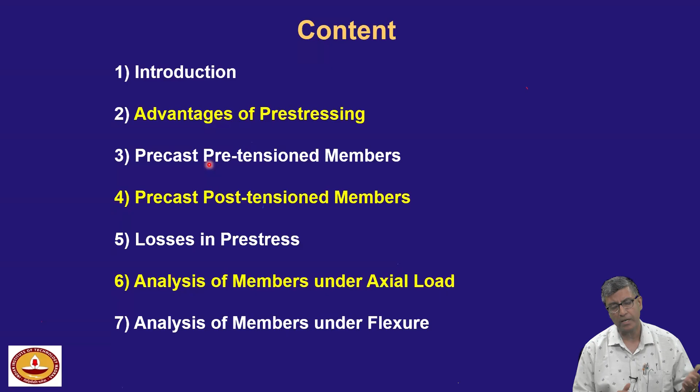Myself and my senior colleague, Professor Devdas Menon, developed a web-based course on prestressed concrete structures under the National Program on Technology Enhanced Learning. If you are interested, you can go there and learn more about prestressed concrete. I picked up the slides from there, but summarized into a packaged form for one hour.

The relevant code for prestressed concrete in buildings is 1343. However, if you're working with bridges, you have to follow IRC 112. If you're working with railways, you have to follow the IRS code. That means you have to have this flexibility whenever you go into the industry.

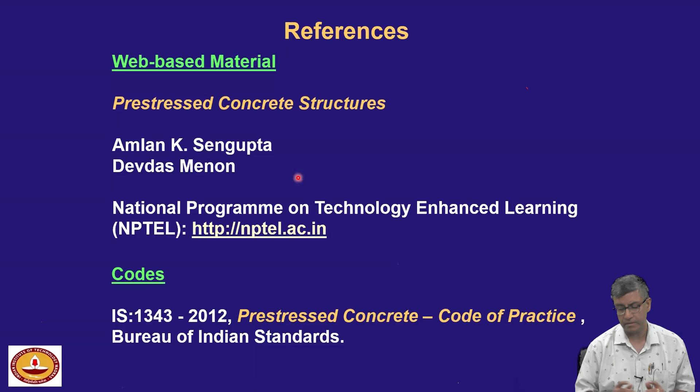Now, what is prestressing? It is the application of an initial load on a structure to enable it to counteract the stresses arising from subsequent loads during its service period. Once you put an initial load, the member is always under load. Conventional members are under self weight and superimposed dead load, but a prestressed member is also subjected to compression. Hence, creep is much more important in prestressed concrete compared to conventional reinforced concrete.

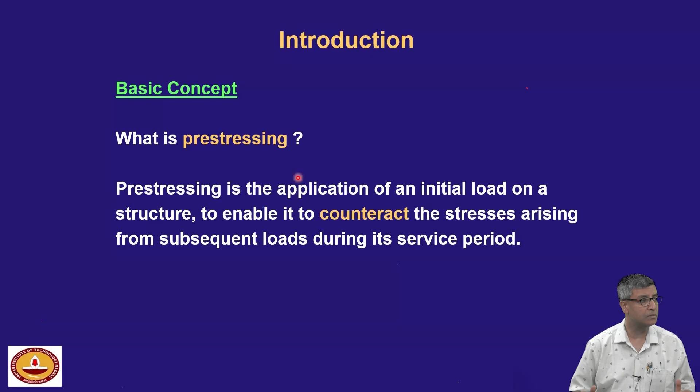Now, if I look into India, prestressing was done during British time, in Meerut and Karachi, where airport hangars were prestressed. After independence, the northeastern part of our country got disconnected completely because the railway lines ran through present-day Bangladesh. The Assam Rail Link project was taken up on a war footing to get the northeast connected. The whole country was in turmoil at that time. There was a refugee influx and a lot of problems. This was a mega project taken up by the Indian Railways.

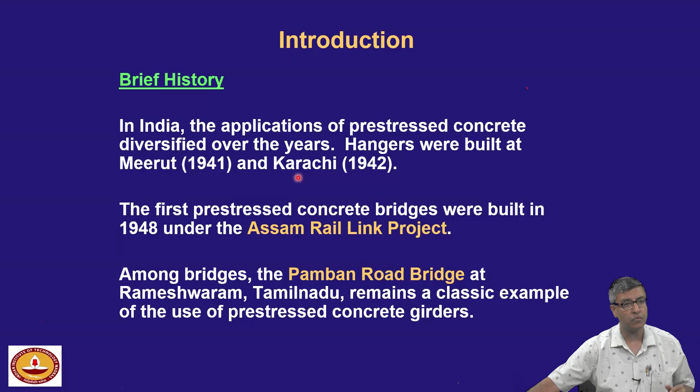Among the bridges, the Pamban Road Bridge is a classic example, and I will show you photographs today, which connects Rameswaram Island with mainland India. The person behind the Assam Rail Link project was Karnail Singh. There is a classic report by him, a complete story of the Assam Rail Link project, which you can download from the internet, and you'll appreciate that even 75 years back, it was absolutely brilliantly written, not just theory but how it was implemented. He was also supported by John Gammon, who had come to India to bring in the technology.

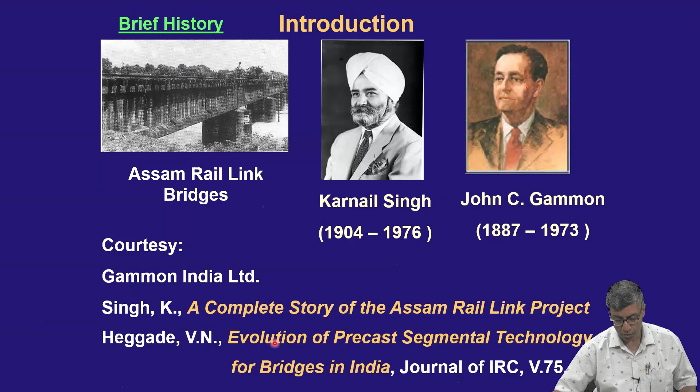Mr. V.N. Heggade, who was with Gammon India Limited, his journal Evolution of Precast Segmental Technology is also worth reading. Sitaram Joshi was actually a Gandhian in principle and dress. He wanted to bring this precast technology. Please note, Atmanirbharata or being self-reliant is not a present-day buzzword.

No, it was right after 1947. If you look into this advertisement, his company is designing this Kosi bridge in UP. Please note, the bridges in UP and Bihar are in extremely challenging conditions because of these rivers which flow heavily during the rains.

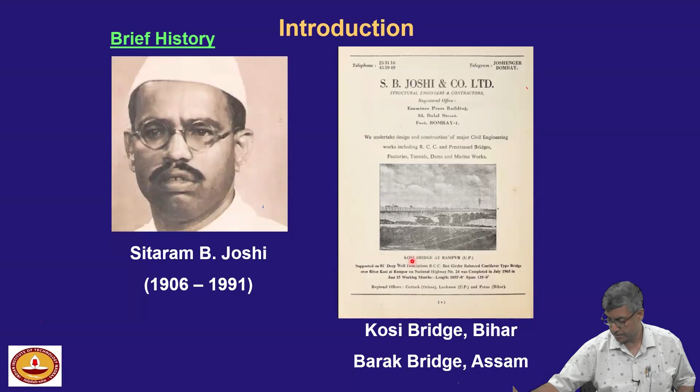T.N. Subba Rao, who was the lead of Gammon India Limited, was a pioneer of what Gammon is today. Please note, these companies have an illustrious history.

Our present generation doesn't know. Now, ignorance is not a solution. That's why we have to stay aware of what civil engineering has done to our country. We cannot blame our ignorance and say there's nothing in civil engineering. Okay, you have role models. Better let's live up to the expectation of what our forefathers had left to us.

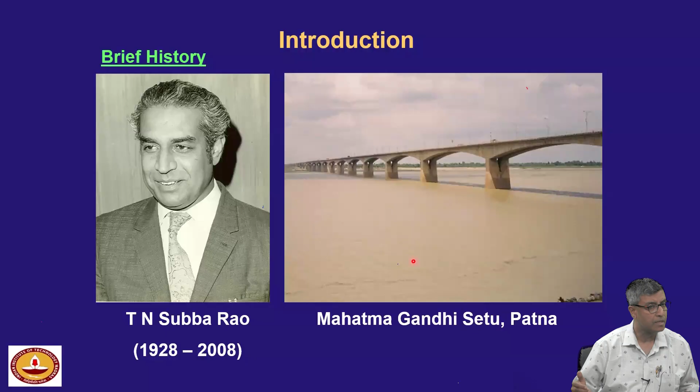This particular bridge, the Mahatma Gandhi Setu in Patna, is a classic example of the prestressed technology. In present day, of course, it has been subjected to corrosion. Now the superstructure had to be replaced, but that's a different issue.

Coming to the Pamban Bridge, this was done by Gammon. And here, if you look, these navigational spans, which have to have a minimum clearance from the high tide level, were done using prestressed box sections. The approaches were, of course, of a different type. Apart from the steel bridge in Pamban, this bridge also is a classic example of technology, and this remained the only marine bridge till the Bandra-Worli Sea Link came up.

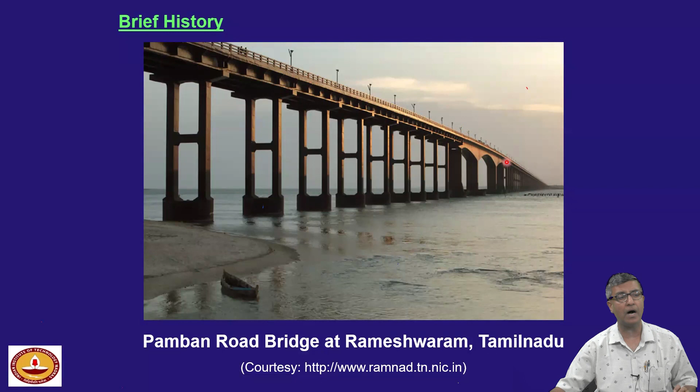And now we also have the Atal Setu, which is an absolutely brilliant technological marvel. Mr. Raghavan had mentioned about Chander Alimchandani. I did not mention him on the first day because his work was primarily with bridges. Today I'm mentioning him. He was the lead of STUP.

He worked with pioneers in France and brought that technology to our country. This project was mentioned by Mr. Raghavan, the aqueduct in a very dry area of Maharashtra, where this pre-stressing was done. The whole section was optimized based on the hydraulic pressure. And what a wonderful aesthetic design just for an aqueduct.

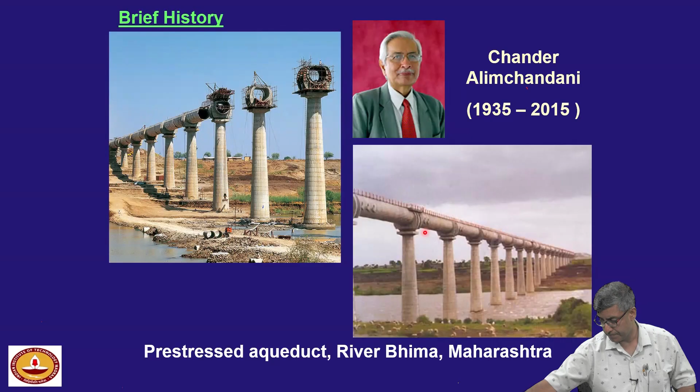He has been honored by FIP. Even Mr. Subbarao had also been honored.

Mr. Mahesh Tandon was trained in the US and has the Tandon consultancy, and they have done wonderful work throughout Delhi and other parts of the country. They have worked on the metro viaducts, and pre-stressing has been extensively used in this type of design.

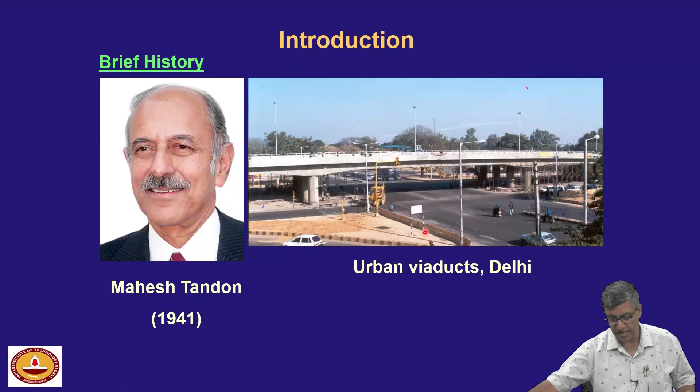Now coming to the advantages. First and foremost, under service conditions, pre-stressed concrete sections stay uncracked. Typically, even if we design for a cracked section under characteristic load, since the characteristic load doesn't occur most of the time, the section stays uncracked. And that leads to all the corollary benefits.

Increased durability, increased strength in terms of shear, and it also provides higher moment of inertia. While doing deflection calculations yesterday, I had written in brackets, consider the section to be uncracked. That means if it cracks, deflection will be more. So if you can keep the section uncracked, your deflection will be reduced.

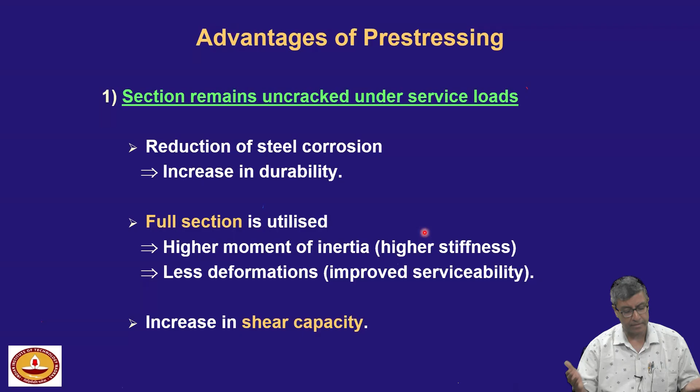On the contrary, you can have higher spans, and that's what the next slide shows.

Another important point because of uncracked sections, which is not very relevant to this present course, but for those from water and effluent treatment, it is very relevant: for any liquid storage tank, especially circular tanks, you can incorporate pre-stressing. That means you can even think of this option, go for a circular section, go for pre-stressing. There are different ways of doing it. Filament winding technique is there, and you can get that technology from abroad.

Now in terms of performance under dynamic load, I have written a buzzword called resilience. These days we are moving towards resilient design. Resilient means reduced damage so that functionality can be resumed as fast as possible. That is possible because the sections stay uncracked. So even under dynamic load we get some benefit, and also under fatigue load.

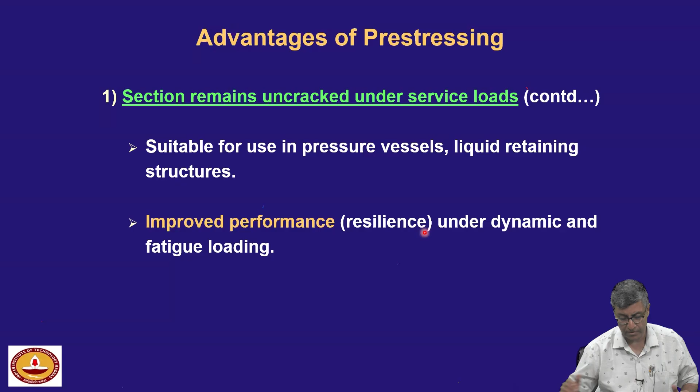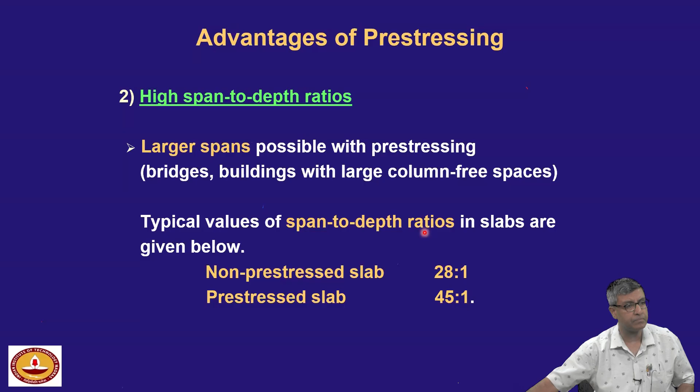The second advantage is high span to depth ratios, which Mr. Raghavan had already mentioned, beneficial for long spans, whether in buildings or bridges. Some typical numbers: for span to depth ratio, non-pre-stressed is about 28:1, while for pre-stressed we can go to 45:1. These numbers I picked up from a book by Professor Collins and Mitchell. For the same span, the depth can be reduced, which leads to reduction in self-weight.

But please note, whenever the depth gets reduced, you may have trouble with deflection. That's why pre-stressing reduces deflection, but if you're also reducing the cross section, that will increase the deflection again. That means finally a deflection check has to be done. It can give aesthetic sections, and they can be economical in terms of at least material consumption.

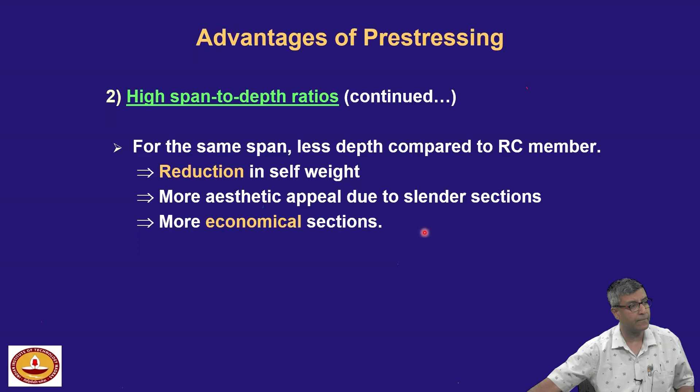But what are the challenges? These challenges I'm saying with respect to the Indian context, that we need skilled technology. It is not just like reinforced concrete, mix something and that's it, put some water and that's it. No. Today, when Professor Liberato was saying that the initial stretching is very important, it has to be done by certified foremen, period. Because these are high hazard, and we are talking of very large members, not a laboratory type of test.

Use of high strength materials is costly. We are going for fiber reinforced concrete. There's a proprietary material called Ductal. These are costly materials which are used in pre-stressed construction. Additional costs for the auxiliary equipment - what are the equipments? We'll be talking about it. And of course, we need quality control and inspection.

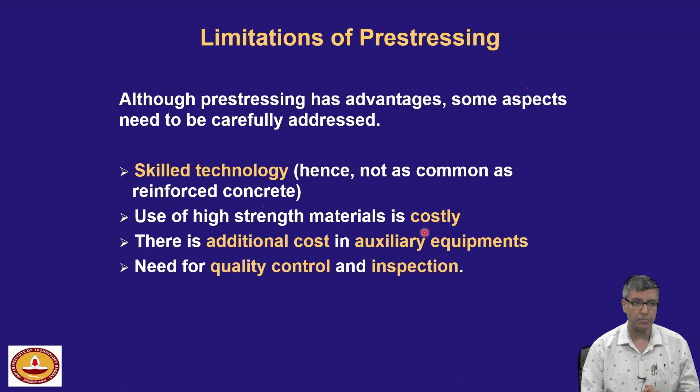Concrete cannot have bug holes, because whenever you are trying to stretch against the concrete, if it is having honeycomb, then there is trouble. Now, the pre-stressing can be classified in different ways based on how you are trying to apply the pre-stressing. Earlier days, they used some screw jacks. These days, we always use hydraulic jacks.

External or internal pre-stressing. External means, which is relatively rare, that the strands are outside the section. It can happen in a box girder, but concealed within the box. Or it can be even outside, which you can see typically for strengthening purposes. The classification which today I will be showing is pre-tensioning versus post-tensioning, because there are subtle differences in terms of the losses.

Linear or circular. Linear means the members are like an axial member, whereas circular means it's for domes, cylinders, pipes, water tanks. These are circular.

Full, limited, or partial prestressing. That means if you are designing a section to not have tensile stress under the service loads, that is called full prestressing. Initial attempts were like that - no tensile stress, then concrete is safe. But then it was found that if I'm designing for no tensile stress for the characteristic load, it is becoming uneconomical, and hence people relaxed that condition.

They said that we will not have cracks - there can be some tensile stress, but no cracking. That is called limited prestressing. In the 1343 terminology, these are type 1, type 2, and type 3. In the other international codes, some different terminology is there.

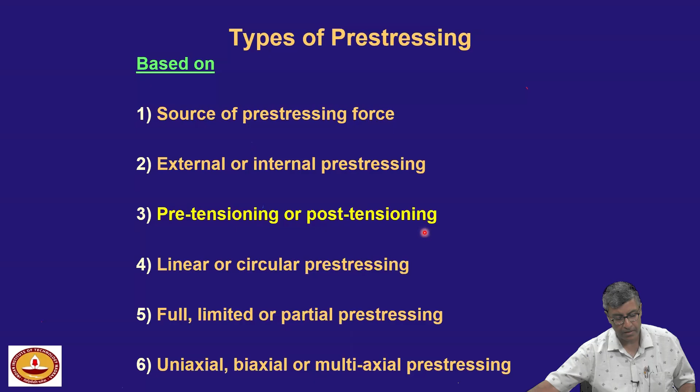Now, in this presentation, I'm just focusing on this pre-tension versus post-tension, and only with reference to precast members.

Now, these photographs I had taken when I went to visit a railway sleeper factory. Let's try to understand the procedure, because what is the purpose of a factory visit? A factory visit will not talk about equations, but it will give you an insight into how theory is being implemented. And let me tell you, unless you can implement the technology, there's no point of just talking in a class. Each of them are entrepreneurs - we typically don't realize who are the entrepreneurs in civil engineering, but they are the entrepreneurs. One Mr. George had established this factory.

This is called a traveling stress bench, where inside we have the mold where the strands are anchored, and this mold is placed within a self-equilibrating reaction frame. This whole thing can move on rails, for different operations at different locations of the factory.

This is the operation at the traveling stress bench, where the strands have been anchored. This is the dead end, and on the other side is the live end. This is the picture of the live end, where the double-acting jacks are stretching out this thick plate against which the strands are anchored.

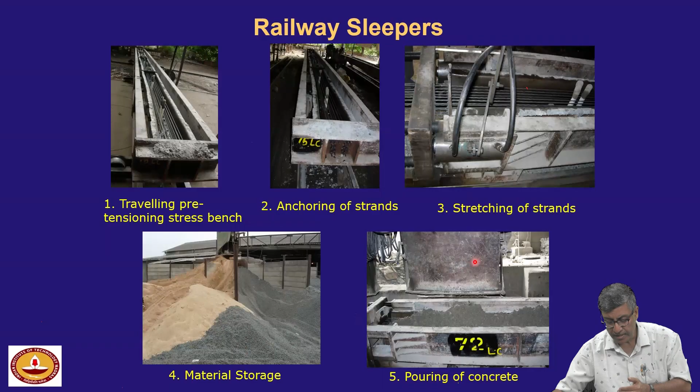From the hopper, there is a mixer up there where we went, but I could not take a photograph because it's very dusty. The concrete comes down through the hopper, and once it is poured, this whole stress bench is vibrated using motors attached to it, which shake it. People will also use needle vibrators, but these external vibrators give a better finish.

Then through the rails it is sent to the curing chamber, where there is a protocol for curing. Once cured, they are brought out and cut, and the individual sleepers are separated. This is the way they are demolded, and then stacked for further moist curing.

From here, the Indian Railways will take this up. In fact, the next photograph I will show is from Patil Infrastructure. Let me show that photograph, which I had shown earlier also.

This is the flow chart for the production of these railway sleepers. I'm just quickly going through them today: mold preparation, fixing of the insert, placing wires in position, stressing, batching after moisture analysis, pouring of concrete and compacting, removing the insert pin. These insert pins are specific for the sleepers.

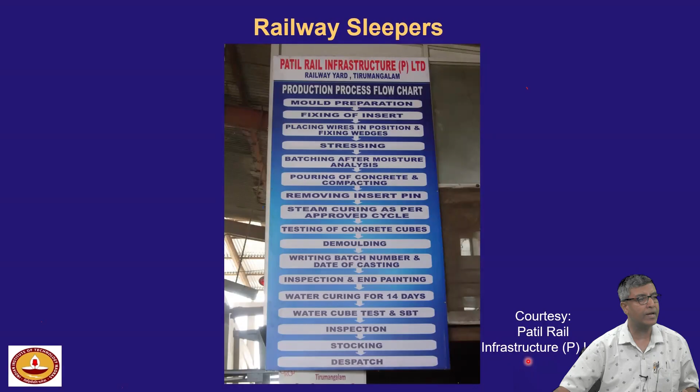This was taken by Patil Rail Infrastructure. They supplied these sleepers to Sri Lanka after it was devastated by the tsunami. The whole Ilam area needed the railway lines placed again, and we in fact went there to see this particular project.

That depends, I cannot give a single number. I felt 16 hours was a bit fast. When I went to this project, they were doing 24 hours. That means it can vary from place to place, depending on what you are producing. Steam curing, typically the way they do a cycle, is equivalent to 7 days.

That means before you're cutting, you're trying to achieve the 7-day compressive strength. Now, if you are able to do it in 16 hours, perhaps that's what they are doing. Even I was surprised that they're cutting it in 16 hours. 16 hours means it's like 2 shifts, whereas 24 hours means 3 shifts, because these plants typically run 24 hours.

I'm not the right person to say which will be applicable where - this is industry information, and it's a very good question to ask the precast people. Their production rate will not be as demanding as railway sleepers, and production rates also fluctuate depending upon demand. Like when we visited Patil Railway, they had to dispatch immediately a huge lot of sleepers to Sri Lanka. Indian Railways had requested us, IRCON, the construction wing of Indian Railways, to check whether what Patil Railway is doing is as per specifications or not.

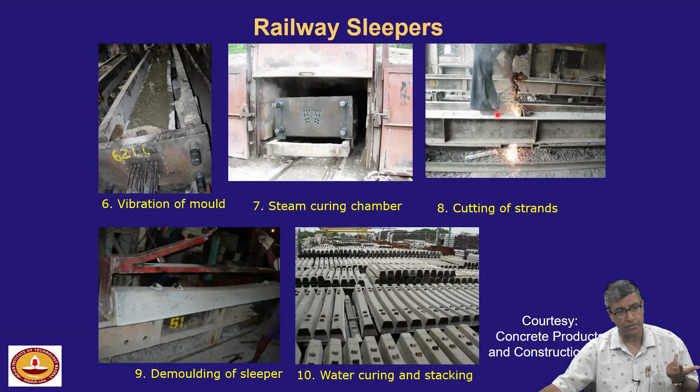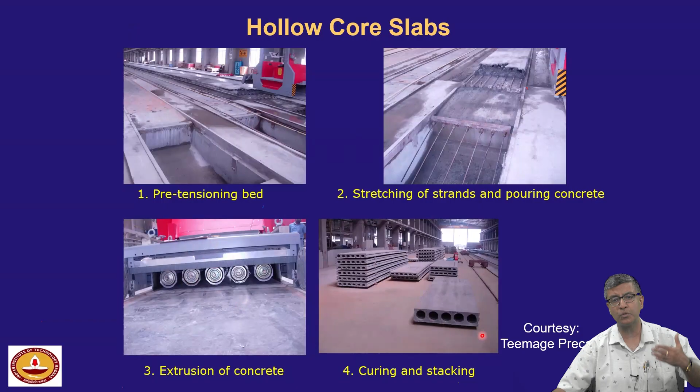This is the hollow core slab, a photograph from Teemage. This is also an assembly line process which I had shown earlier. This is the anchored end, and this is the extruder. There are different types of fixtures to have different types of voids, and finally you get this type of precast pretension product. You have catalogs to know the strength based on their span.

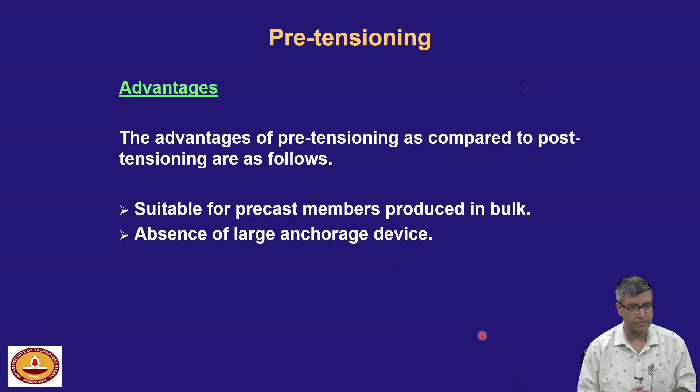Now, what are the advantages of pretensioning? It is suitable for precast members which are produced in bulk. That's why today Professor Liberato said he will restrict himself to pretension. There is an absence of large anchorage device - we need a factory type of situation, but big jacks, big anchorages are not necessary.

On the contrary, the disadvantages are we have to have a pre-stressing bed with end abutments, or a traveling stress bench - stress bench being a shorter or smaller version of a pre-stressing bed. We also need the mold shuttering, the jacks, small anchoring devices, and harping device. Harping device is not very common in our country because it's based on economics - if you are going for a bridge girder, you can profile the strands by lowering down at certain points, which are called the harp points.

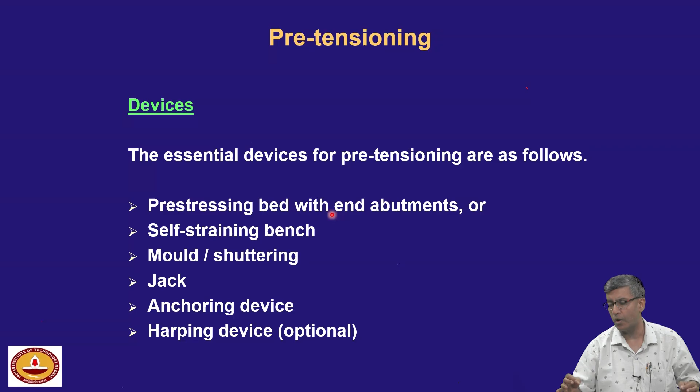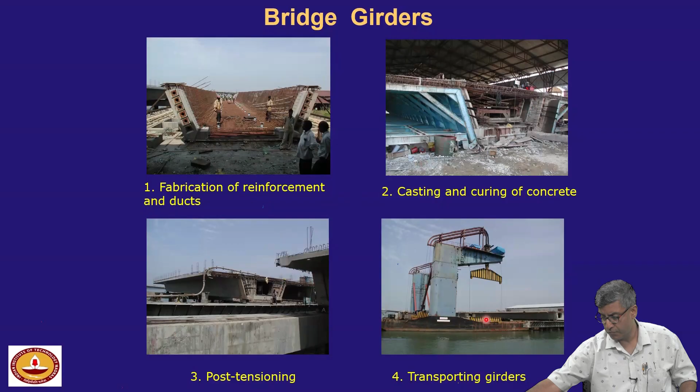Once the concreting has been done and it has got some minimum strength, it is again taken out, because you cannot make factories throughout - these are all temporary facilities. Here they are doing further curing. Once curing is over, this is a floating barge - this operation was being done by Afcons. They're lifting them up, and as Professor Raghavan said, they use this high tide to place this on the piers. This is a nice bridge, actually a set of 3 bridges. I personally felt it was very nicely done, very aesthetically done, in these backwaters of Cochin.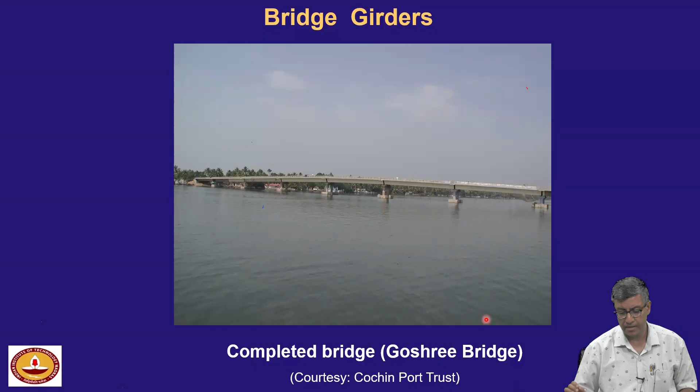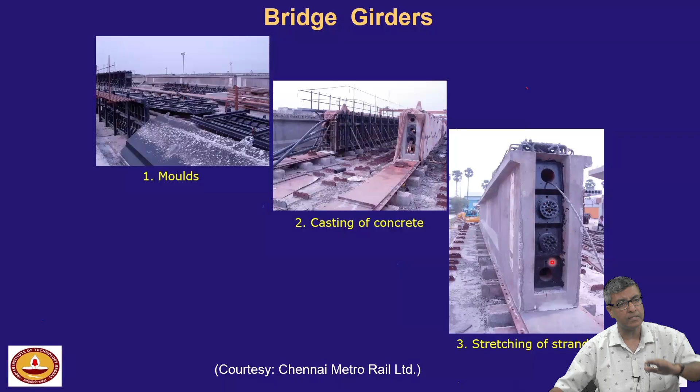Coming to I girders, this factory is in Chennai itself. These are the girders for the metro viaducts. These are the molds where they are cast, the ducts are inside, and these are the anchorages which we need. Once the stretching is over, they cover it up with mortar to check corrosion of the anchorages.

What are the advantages of post-tensioning relative to pre-tensioning? It is suitable for heavy members, with less waiting time period in a casting bed. In post-tensioning, you are taking advantage of the concrete itself to do the stretching, so you don't need any pre-stressing bench.

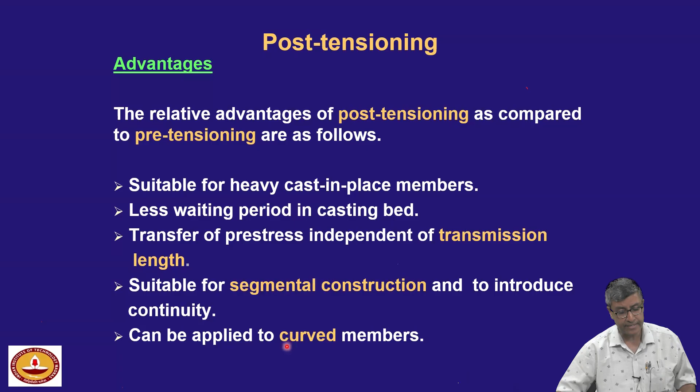Now in pre-tension, since there is no physical anchorage at the end, we need something called transfer length - Professor Liberato was talking about that today. If the transfer length encroaches in the critical shear section, we have to check whether the shear capacity is adequate or not. Whereas in post-tension, we do not talk about transfer length, and it is suitable for segmental construction. I had one section on segmental construction, but since this course is not for bridges, I skipped that section. It can also be applied for horizontally curved members.

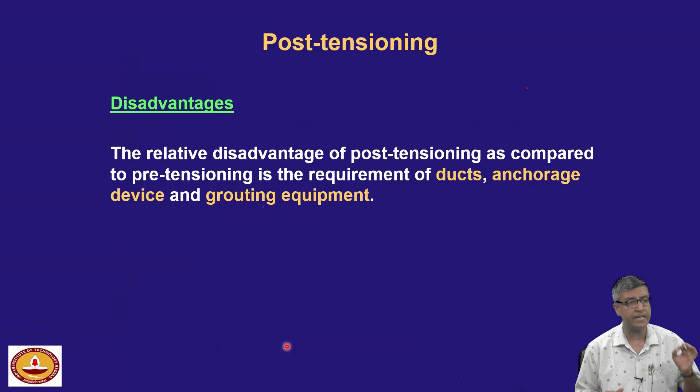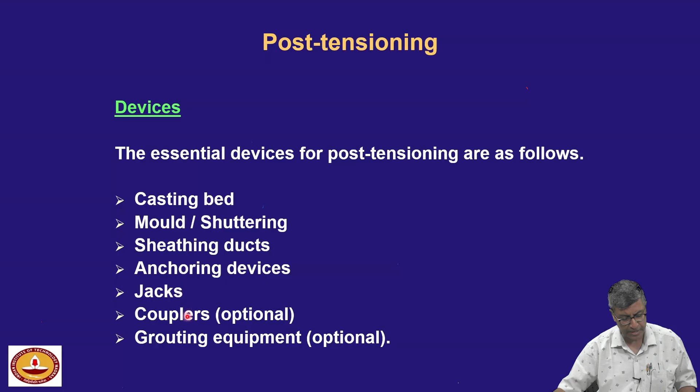Disadvantages are that we need heavy duty jacks, we need the ducts and grouting - there will be a full lecture on grouting by Professor Pillai, as that operation itself is very important along with the material. Devices for post-tensioning: we need a casting bed, which doesn't need an end abutment, just a casting bed, molds, the ducts, anchoring devices, jacks, couplers if necessary, and grouting equipment.

Now, the next important thing is losses in prestress. This is an issue which has to be thought about in the design stage itself. The losses, this is more for undergraduate students, can be broadly classified as immediate losses and time-dependent losses. Now, what are the immediate losses?

Elastic shortening. This was raised today, that in pre-tension members, whenever you cut the strands, the members shorten. That reduction leads to a slight reduction of the pre-stressing force that you have recorded by the pressure gauge. That has to be accounted for somehow.

For a post-tensioned member, if the duct is curved, then there is a frictional loss. If you are having one dead end and one live end, the load you record in the live end will not be the same as the load recorded in the dead end. Where is it vanishing? Because the strand is acting against the duct like a belt on a roller, and that frictional effect reduces the pre-stressing force over the length. That means in an actual design office, you do these calculations at certain intervals because your pre-stressing force is varying.

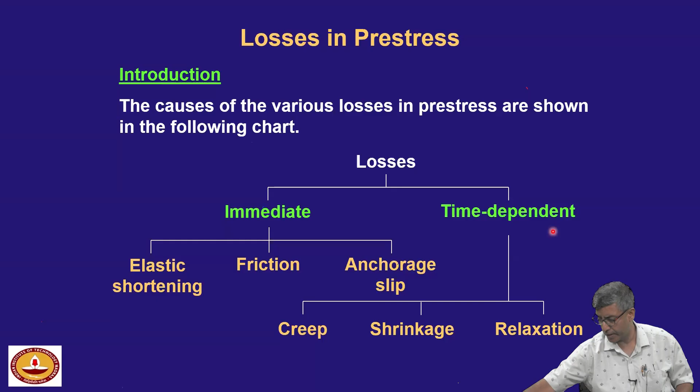The short-term immediate losses are like physical phenomena where we can write equations based on mechanics, whereas the long-term losses are material phenomena. Lots of work has been done on this.

There was one faculty member from Italy, Professor Chiorino, who was monitoring the loss of pre-stress in a dome constructed in medieval times, but then retrofitted because domes have hoop stress. Yesterday, Professor Liberato was talking about this hoop stress in the Pantheon. Similarly, in any dome structure, there will be a hoop stress, and to counteract this, they have done some retrofitting, but they're monitoring it. Please note, there's data of 35 years.

In our PhD program, after 2-3 years, we feel tired. But then you have to have the patience in your life to contribute.

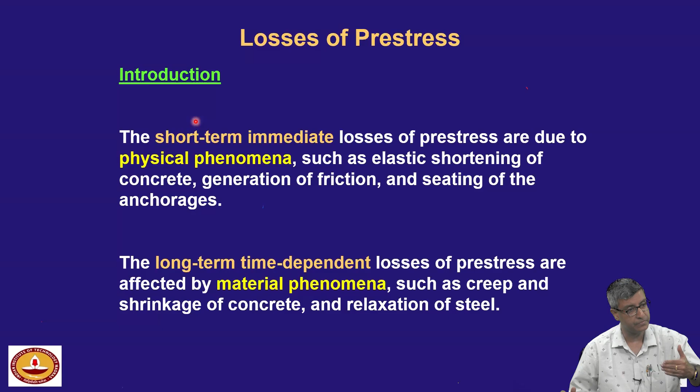Coming to the analysis, I will be very briefly going through it so that at least those who are not familiar with prestressed concrete can do some basic calculations. For an axial member - what are the axial members? It can be like the ties of a truss.

Once you release the prestress, the stress is like a uniform uniaxial compression coming on the concrete. What is the stress? It is the force divided by the area of the concrete, which can be approximated to the total cross sectional area. Precisely, you should remove the area of the strand, but for today's tutorial purpose, you say that area of concrete is equal to the area of the section.

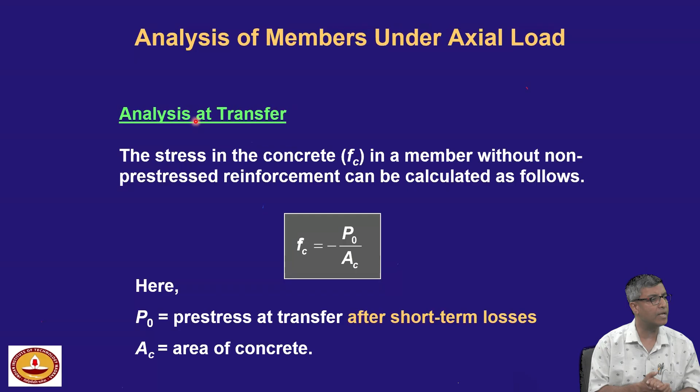Next, once it is subjected to a service level load, then there is some tension. Please note, in my notation it is just the opposite of what Professor Liberato has said. In my case, the compression is negative and the tension is considered to be positive.

Now, I have written plus minus, in case a member comes under compression, a prestressed member, then actually its strength comes down. It is not good to prestress a member under compression.

But then you may ask, why do we prestress piles? Because the piles in marine environment are subjected to a lateral load constantly. During earthquake, they can be subjected to uplift forces. And hence, for those situations, you are doing the prestressing. You are paying the price by slightly increasing the section, but prestressing is beneficial for the service conditions under constant lateral loads.

Now here, how do you calculate the stress? The first component is due to the prestressing force. Please note it is now effective, means after the losses. To that, you are either adding or subtracting the effect due to the external force.

Here, I have written the term transformed section. What is transformed section? It is the equivalent, as if it's an equivalent concrete section. But again, for today's tutorial or even for quick calculations, you can say that transformed section is close to the gross section. That's it.

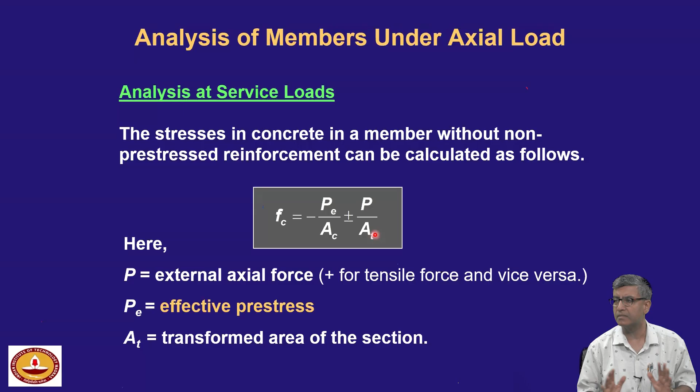Coming to the members under flexure. Why do we do the analysis? Now, we have to be clear that when to do the analysis. First, the permissible prestress based on allowable stresses at transfer.

This was also mentioned today that prestressing, the stressing operation itself, whether it is post tension or pre tension, is a testing time of the concrete that you have cast. And hence, the stresses have to be limited to allowable values based on the instantaneous concrete strength.

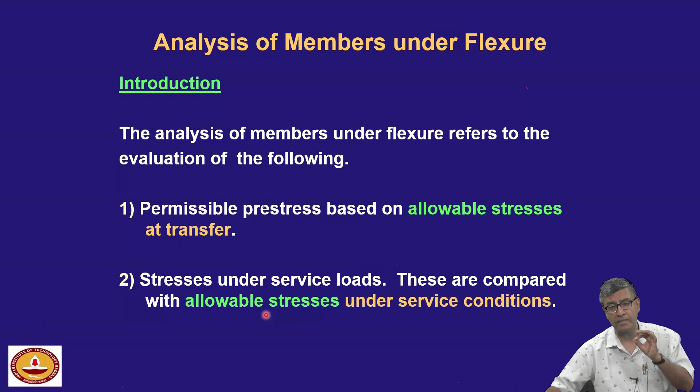Next, you check the stresses under service conditions. The stresses should be under the allowable values permitted for service conditions.

And then we talk about, in case if there is an overloading, what will be the moment that will nullify the effect of compression? That is called moment at decompression. Or if the moment further increases, what is the moment at cracking?

And finally, you see the ultimate strength, which Professor Liberato had mentioned. Ultimate strength means it's the once in a lifetime event. But that's where we cannot compromise, that at least we should design that structure for that rare or extremely rare condition, because our civil engineering failures can be devastating.

I tell my students that don't lose faith in civil engineering. If you are in electronics manufacturer, if it doesn't work, yes, it may create trouble. Your cell phones may not work, it creates irritation, but you throw it off and buy a new one, or you tell your parents to buy a new one for you. Of course, if there are troubles in aircrafts, then it's what can happen.

However, in civil engineering, it can be a disaster. We should actually all learn from the aviation, what happened, that if you are neglecting any step, it can create a disaster. And sometimes our students think that, oh, anyway, we have safety factors that will take care of my wrong calculations. No. Safety factors take care of the inherent variability in the material. It is not there to take care of your mistakes.

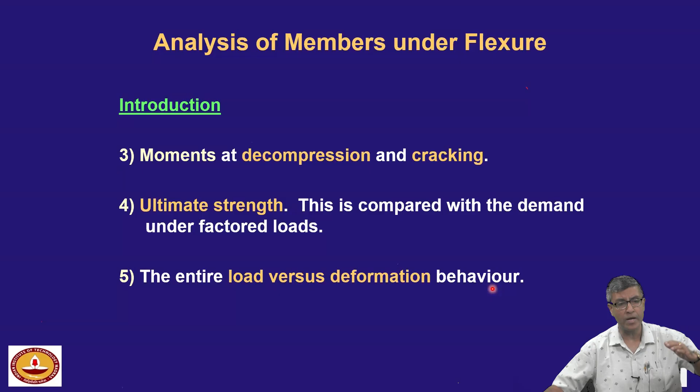And the entire load versus deformation behavior, that is we need if I want to study what is called ductility. That is important whenever there is an overloading. If I am using prestressing for seismic purpose, then this becomes important. Today I am not going through all this. I will be just restricting myself to calculate the stresses.

In order to calculate the stresses under service condition, at transfer or under service conditions, we use the main assumptions. The plane sections remain plane, but today Professor Liberato nicely mentioned that when you cannot consider a linear strain diagram, even if plane sections remain plane. And when does plane sections remain does not plane? Pondalraj can explain that, whenever the members are deep, and he studied deep girders.

Here what we are considering is that the members are straight and distribution of the normal strains is linear across the depth. Some of these assumptions we just take it for knowledge in our undergraduate, but as you grow up, you should understand where they cannot be applied, because in your real life you will be having exciting sections, not just the standard beam.

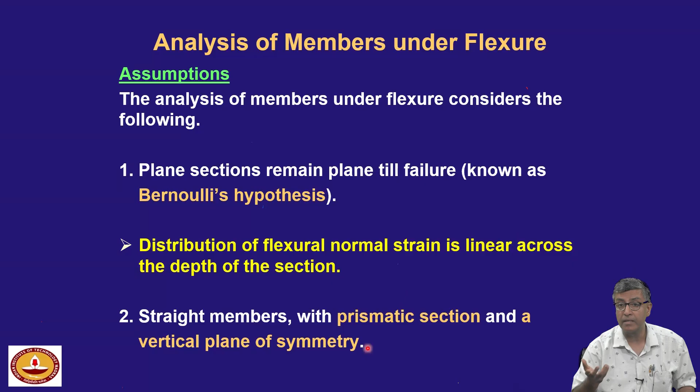And for the straight members with prismatic sections, there's a vertical plane of symmetry. That's what we are assuming. We are not talking of curved members here, or members which can be subjected to what is called lateral torsional buckling. Those it can come, we are not talking about here.

Now, since it remains uncracked, at least at transfer and hopefully in service, we can use the principle of superposition. What this means is that the stress due to one effect, I'm adding the stress due to another effect and getting the total stress. But you cannot use the principle of superposition once I'm going into the nonlinear region, especially for the deformations. Please be careful.

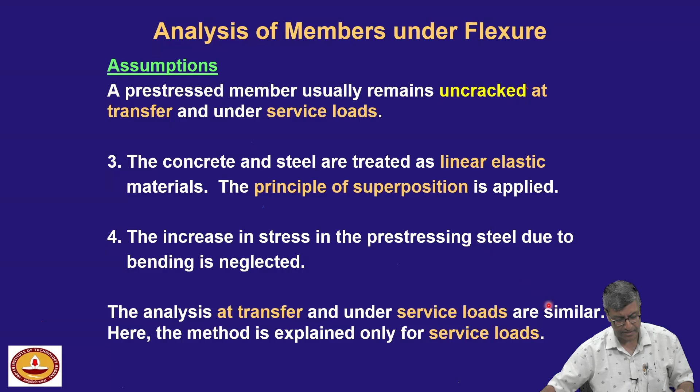The increase in stress in the pre-stressing steel due to bending under service load - we will neglect it. The analysis at transfer and service loads are similar. I'm just explaining for the service loads. If you're talking of any analysis for the transient situation, like during lifting, you can follow similar lines.

The analysis can be done in 3 approaches. The most important is a stress-based approach. It is necessary because we have to ensure that the stresses are limited. The second approach uses the force concept, and this is used in the design - whenever I'm trying to know how much pre-stress I have to place, I need to know the force.

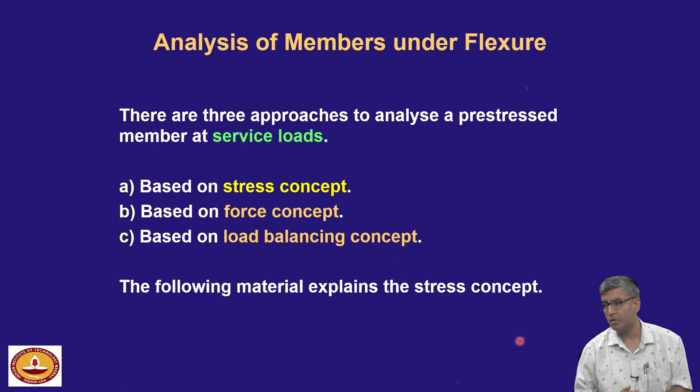That is a force-based concept used for the design. The third concept, the load balancing concept, is typically used for deflections. Yesterday I told you a formula for deflection of the planks or beams. But if the same members are pre-stressed, you have to account for the camber due to pre-stressing and the deflection due to self-weight and superimposed dead load, and come up with the final deflection. That is the load balancing approach.

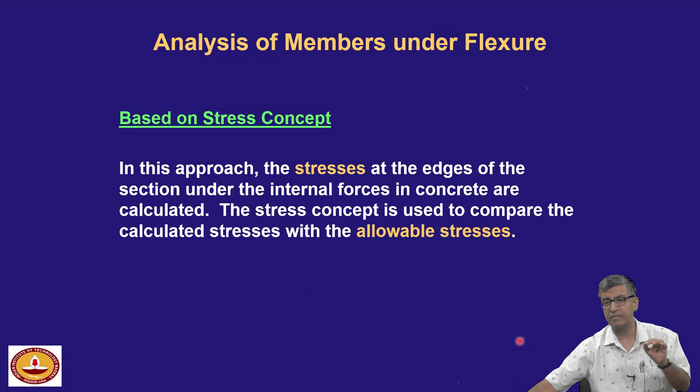Here we are just restricting ourselves to the stress concept, and the purpose is to check that the stresses at transfer, at service, and somewhere in between are within the allowable values. Here I'm giving an example based on a member with a strand which is at constant eccentricity throughout the length, just for demonstration.

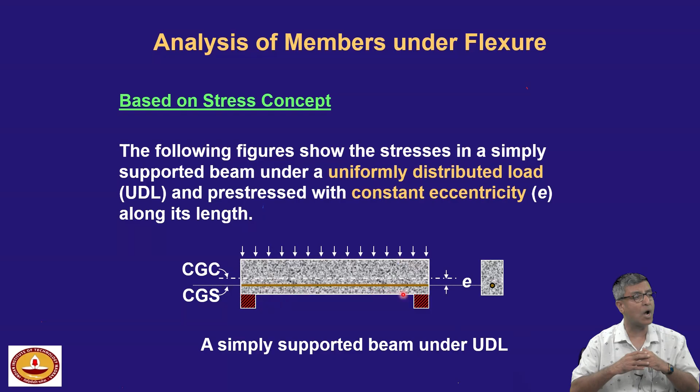Here, as if it is subjected to a uniformly distributed load, and the strand is there to counteract the effect of this load. Now if I try to understand this, I would prefer that you draw this type of sketches. My advisor would not give marks if you do not draw these sketches. What are these sketches? These are the individual components. You don't have to memorize formulas - you have to just understand the mechanics.

First, this is a condition which can be there at service or at transfer. At transfer, M is equal to only the self weight. At service, M is the total service load moment. At transfer, P is the value right after immediate loss, whereas at service, P is the value after the total losses. This P first has a uniform component, which is P by A.

The negative sign is to mean compression. Since the strand is eccentric at the midspan, I have a varying stress, where for a positive eccentricity, meaning positive bending, there I put more compression at the bottom. Then with the external load, it is just the reverse stress diagram. All three give us this stress profile across the depth.

What we are interested in is the stress at the bottom and the stress at the top. At transfer, my stress at the bottom is highly compressive - it should not cross the allowable value. The stress at the top may become tensile. I have to be careful, it should not crack.

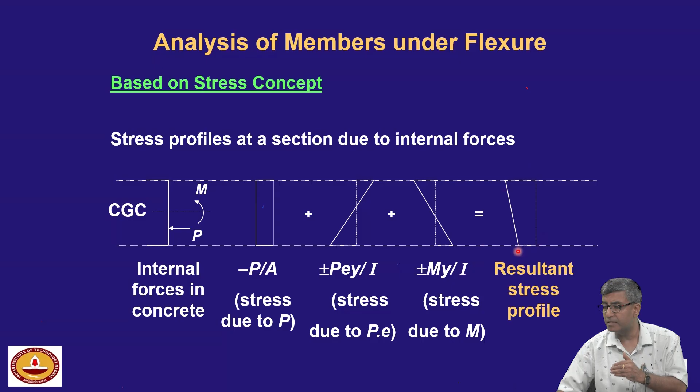On the contrary, under service condition, the stress at the top should not be very high, as that gives a lot of creep effects. And the stress at the bottom depends upon whether you are designing it as type 1, type 2, or type 3 member. If it is type 1, no tensile stress. Type 2 means tensile stress but less than the cracking value. Type 3 means it's limited.

If a tendon is curved, which is in a post-tension member, one can be a bit more picky by taking only the horizontal component, but that is not necessary.

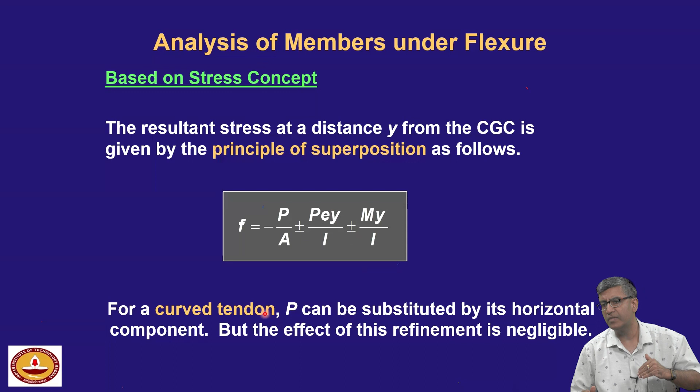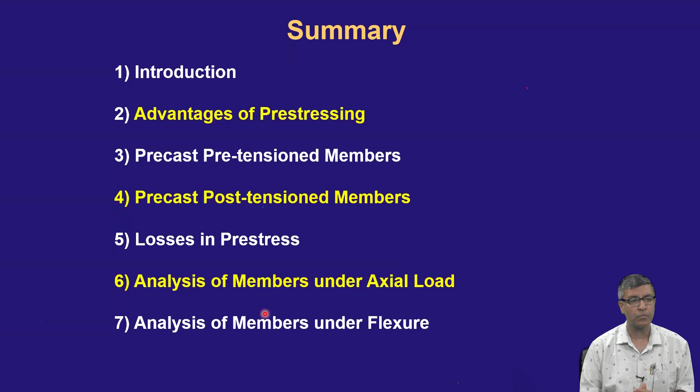With this, I am ending this coverage of prestressed concrete, just to make you aware that this technology is very much in tune with precast members, and hence at least I should know the basics of analysis. Whatever I covered, for those of you who are undergraduate students, will also help you in your GATE exam. In GATE, this is the syllabus for prestressed concrete - they will not ask you any design questions or anything about shear or anything else.